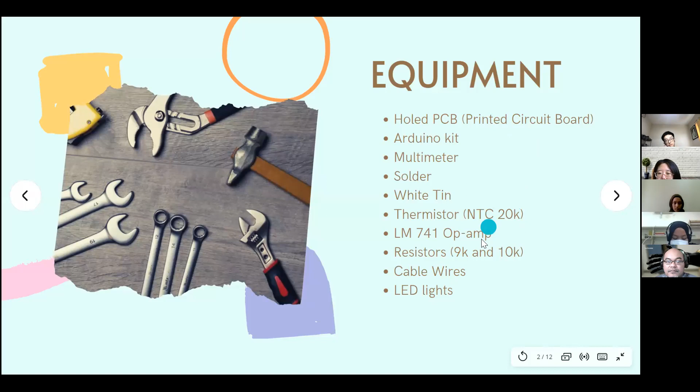This is the equipment that we use. We'll use PCB, thermistor, op-amp, resistor, and the other things.

So how does it work? First, the NTC 20K thermistor will sense the temperature and it will set the value of the resistance. Then, if the temperature is lower than 38 degrees, there will be no voltage outputted. And if the temperature is higher than...

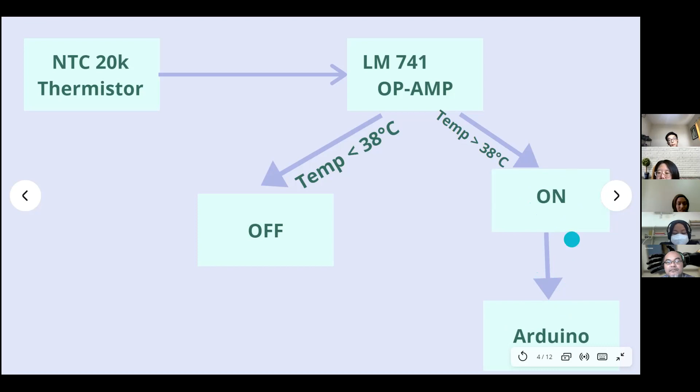...38 degrees Celsius, which basically means you have a fever, the op-amp will output voltage and it will turn on and set the Arduino on, and the Arduino will then set the LED to light.

So this one is the NTC Thermistor. Basically, the NTC Thermistor we use means that as temperature increases, the resistance will decrease.

And we will be using an LM741 op-amp. Basically, the important thing here is the supply voltage maximum, which is around 18 volts. For our project, because we are within the range of -55 to 125, we decided to use this LM741 op-amp.

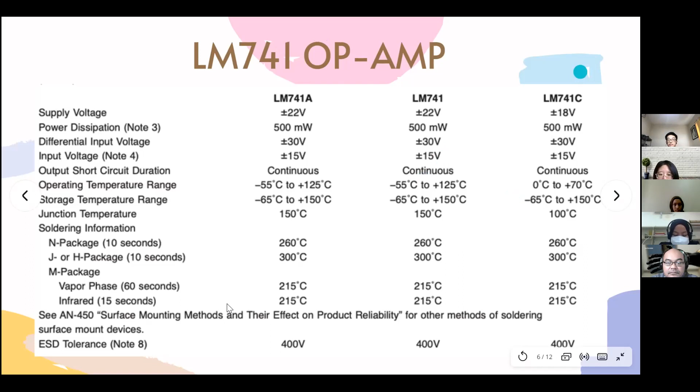Okay, so this is basically the circuit that we thought of for the temperature sensing. In Multisim, we don't have a thermistor, so we decided to model it with a resistor.

So basically, how an op-amp works is that the difference between the input voltages will be amplified by the operational amplifier. Due to the high gain of the amplifier, if there's a difference, it will amplify the voltage.

Now, if V plus, which is connected to this one, is higher than V minus, then the op-amp will produce an output. However, if V plus is less than V minus, the op-amp will not produce an output.

Basically, this resistance value we chose through trial and error of calculation, because we want to make sure that at normal temperature, it does not produce an output. How we determine the resistance value for the thermistor can be seen in the next slide.

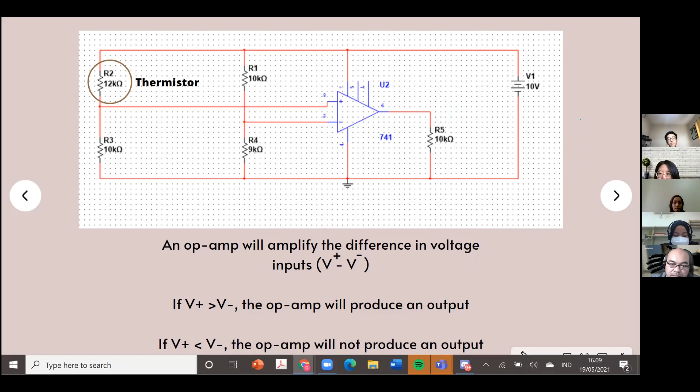And so we model it as 12K in the Multisim. And for the fever temperature, if it is higher than that, it is around 11K ohm.

So this is the circuit when the thermistor resistor is set to 12 kilo ohm, which means it's in normal body temperature. When we applied the voltage divider formula to this, we get that V plus is less than V minus. Therefore, there is no voltage output, so it would just be off.

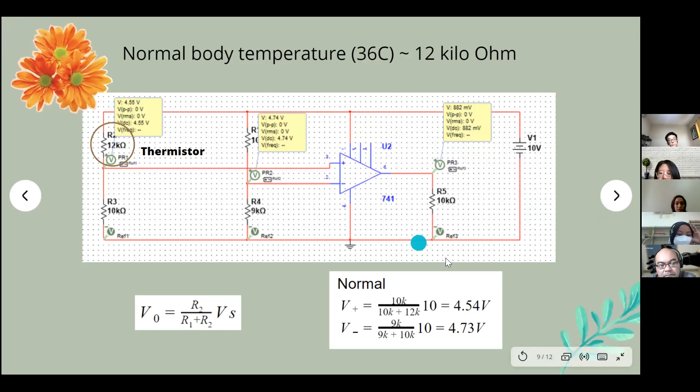This is when the thermistor resistor is set to 11 kilo ohm, which means it's in a high body temperature. Calculating again, we get V plus is bigger than V minus. Therefore, there will be a voltage output, which means it will activate the Arduino.

So for now, we haven't finished with the Arduino program, but basically later what we plan to do is make the Arduino read the temperature as the thermistor resistance increases or decreases, through the Steinhart-Hart equation shown here. And of course, later we will try to construct the breadboard circuit. Yeah, I guess that's it for now.

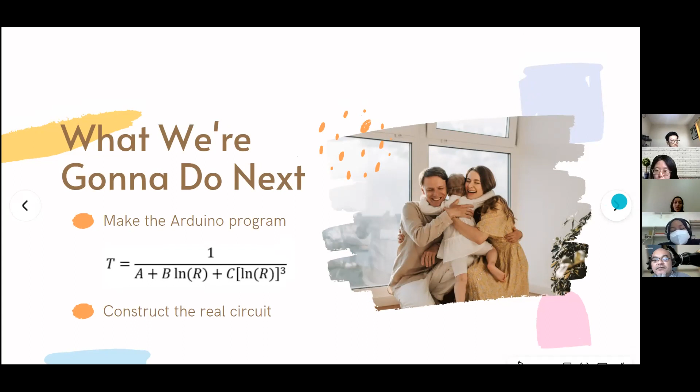Hello, can you hear me? Yes, we can hear you. Okay, I have a question. Where are you planning to place the Arduino?

We're planning to place it next to the VPR3 over here in the output area. Oh, why over there? Because that part is where the op-amp will produce an output, so we can try to relay the output.

We also plan to use a relay circuit, and later we will connect it to the Arduino, and basically it will turn on or off. Oh, okay, that's quite clear. Okay, thank you, Jesse. Hanif, one last question: why do you use a 20K NTC Thermistor?

Okay, for the 20K thermistor, we actually also tried the calculation with a 10K thermistor. However, because we want to find a small range of temperature, the 10K one gives a small range of resistance at that temperature, so we tried using 20K instead. We can see that from 36 to 38 Celsius, it decreased from 12K to 11K. But for the 10K thermistor, the drop in resistance is very low, so there's not much difference, making it hard to get an output using a 10K thermistor.

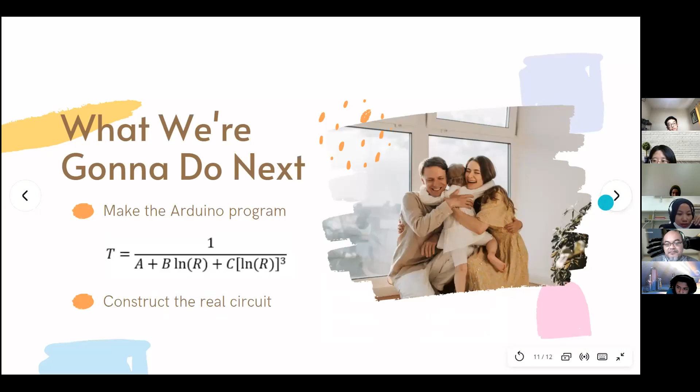It's like the previous one, Group 1, this is the same. This is not active temperature sensing. Do you understand why this is not active temperature sensing, what you just presented? Yeah, because we don't control the current. Yeah, exactly, there's none. So this is too simple for you. I know three of you are smart, you should do more challenging projects, not just like this.

Do you understand how to make it an active temperature sensing? We will try to use a heater later. Yeah, if you don't understand, you can ask Martin, Martin already understood.

Active temperature sensing does not detect temperature passively like you're using now with a thermistor. The thermistor is just based on material properties, NTC or PTC. Then you try to convert that resistance change into voltage change, using either a voltage divider or Wheatstone bridge. But that is just to display. The function of the Arduino is just to display the temperature.

What I want is for you to use the project title as shown in Google Classroom: thermal regulation in an active temperature sensor. Thermal regulation, that is the keyword. To regulate the thermal, it means you have to use a heater, a heater that will flow current through it such that it has a certain temperature.

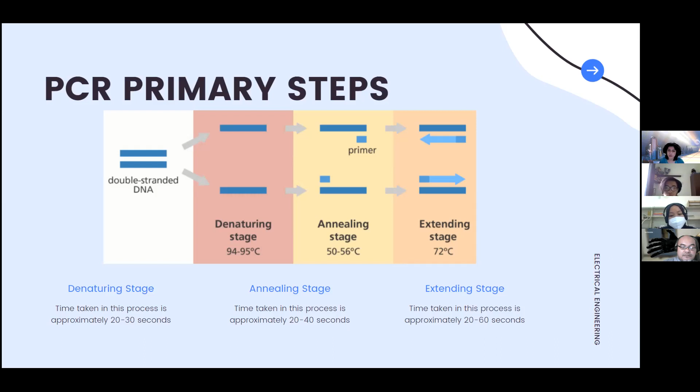This is so challenging because we have to maintain the temperature within a specific range. For instance, if we have a higher or lower temperature than ideal in the annealing stage, the primer would not bind perfectly to the single-stranded DNA.

Our proposed solution is to build a thermal cycling system using a microcontroller called Arduino Uno, which functions to control all the components in the system and control the temperature of the sample.

Because our focus here is only the electrical part, we're going to use a sample in the form of water.

The four main components for our device are: a heater, a cooler, a temperature sensor, and an Arduino.

For the heater, we're going to use nichrome wire, which is a non-magnetic alloy of chromium and nickel, commonly used as a heating element.

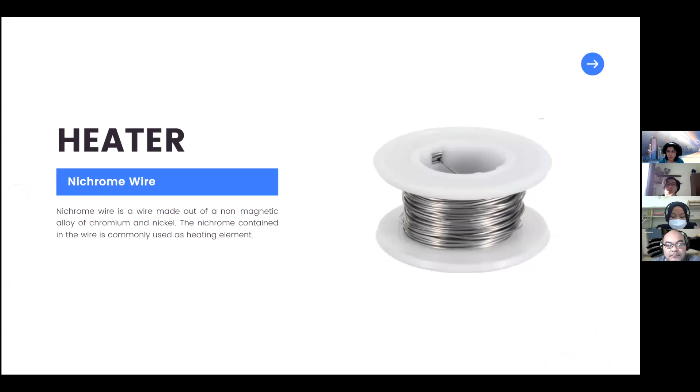The advantage of using nichrome wire is that it is low cost and relatively stable at high temperatures. To improve its performance, we form it into a meander shape, which will be shown in the next slide.

For the cooler, we're going to use three different components: the Peltier cooler, the heat sink, and the cooling fan.

The Peltier cooler is a thermoelectric cooler, or TEC, which uses the Peltier effect. It's like an active heat pump that transfers heat from one side of the Peltier cooler to the other, so in the end one side will be hot and one side will be cold.

A heat sink is a component that provides a surface area for heat to flow away from hot components, similar to a cooling fan, improving the performance of hot components.

The cooling fan, similar to the heat sink, also improves the performance of hot components such as the Peltier cooler, by blowing cool air onto them.

For the temperature sensor, we're going to use a thermistor, a device used in a circuit to measure temperature. The advantage of using a thermistor is that it's very sensitive.

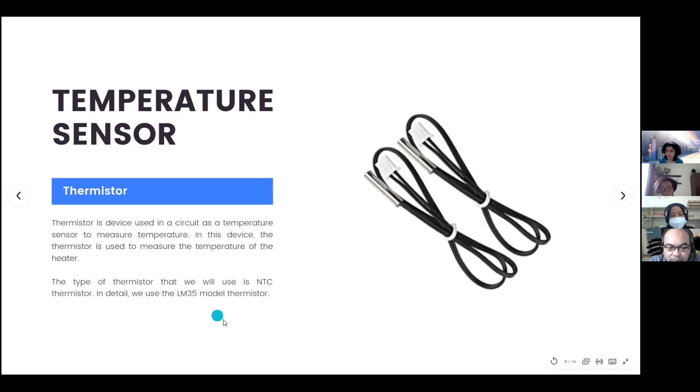Okay, for this, these are some other components that we use in our circuit: the relay, the 4-channel relay, the resistor, and the adapter, a 12-volt adapter.

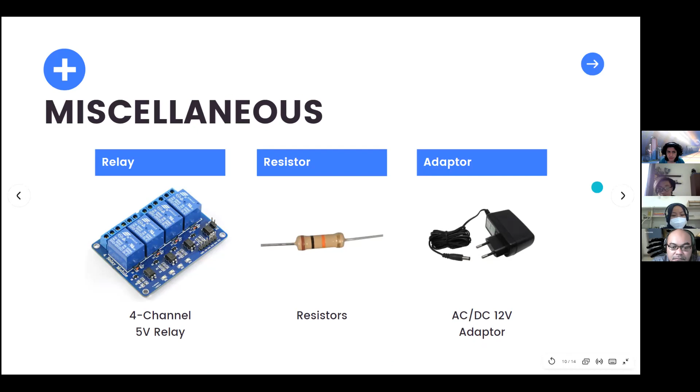Now we're going to talk about the outline of the circuit. Basically either a 12-volt battery or adapter AC to DC converter is connected to the relay. Because we have a 4-channel relay, which is connected to the 4 elements, we connect this power supply, the battery, in parallel so that each channel obtains 12 volts. Then it is connected to the Arduino Uno digital input, so that the Arduino can detect all these 4 components and control whether to turn on the heater, turn off the heater, turn on the cooler, or something else.

We also connect the thermistor into the Arduino Uno so that we can read the temperature. However, the Arduino cannot just directly read the temperature, so we have to convert the resistance of the thermistor into a readable temperature using a specific equation, the Steinhart equation. Then the Arduino itself is going to be connected with the computer.

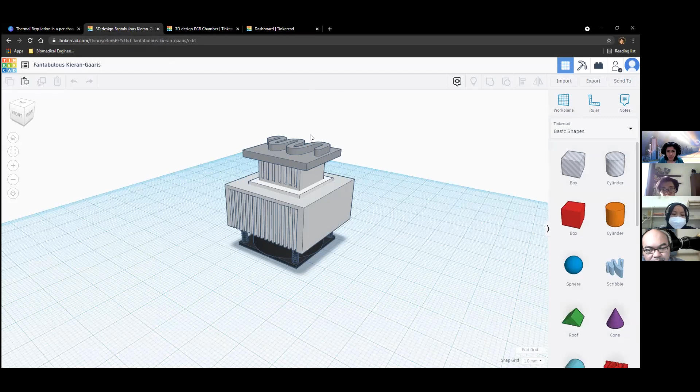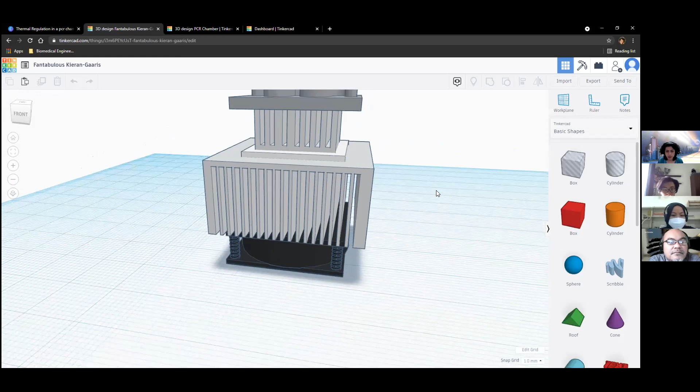For the schematic, we've made a design in Tinkercad. This is the heating element, the nichrome wire, and it is separated with the conductor. Underneath is the cooling element. The white square here is the Peltier cooler, and it is attached to heat sinks. On the bottom we have this cooling fan.

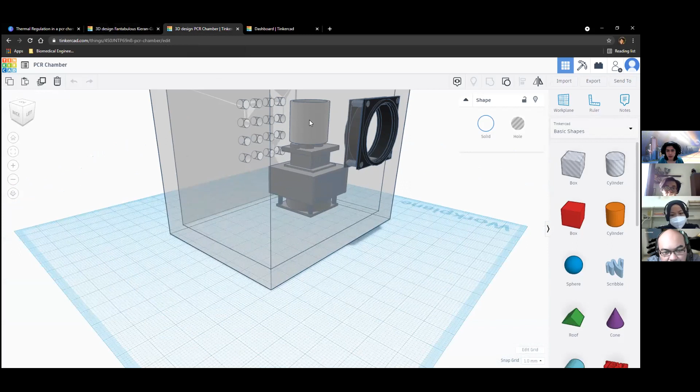It will blow air to the hot side of the Peltier cooler. This is just a rough sketch, and the casing is optional if you want to make one. These heating and cooling elements will be included inside the casing, and on top of the heater we're going to add the water sample.

In this area we're going to make a partition to include the circuit, the Arduino, and stuff. We're also going to connect the thermistor into the heating element so that we can keep track of the temperature, whether it is more than the ideal temperature or lower than the ideal temperature, so we can monitor and program it in the Arduino.

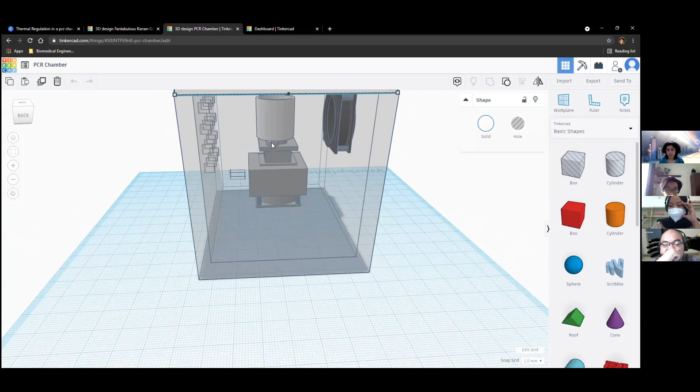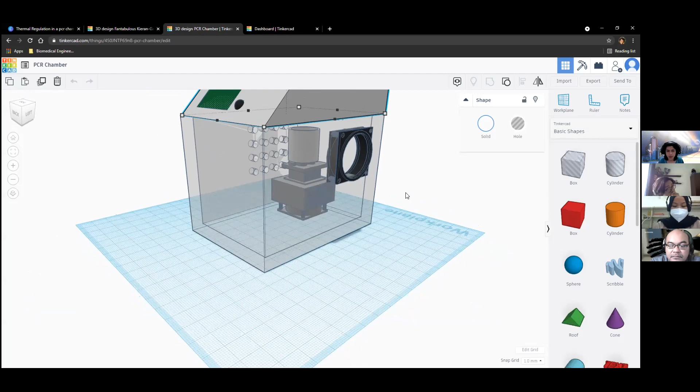For the sake of air regulation in the casing, we make some holes on one side to let air go through. Then this fan on the other side sucks out all the heat inside the system and out of the outer system. Yeah, so basically that's it.

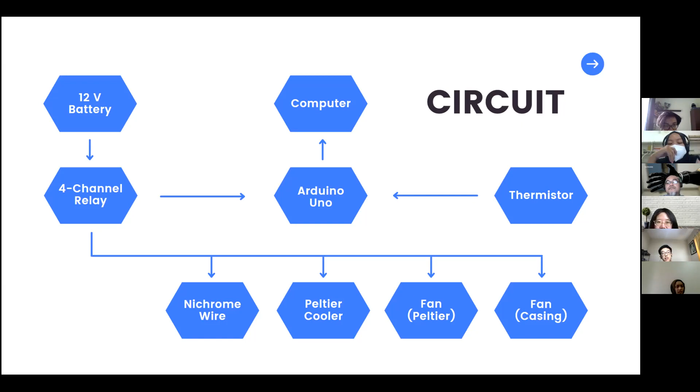Basically, the top side of the Peltier cooler is the cold side, and the bottom part is the hot side. When in doubt about determining which is the hot or cold side, you can just plug in the Peltier cooler for a few milliseconds, because it is very sensitive to temperature change. So you just plug it in, then unplug it, and test it with your hands to feel whether it is the hot side or the cold side.

The cold side will be connected to the upper part of the heating elements, and the hot side will be blown by the fan on the bottom part, as shown in the schematics.

Okay, thank you. Kak Devita, maybe one short question. Please unmute yourself, Kak Devita. Okay, can you please move to the slide that shows the Tinkercad design of your instrument?

Can you please explain why did you build the instrument like that? Like the Peltier is between the heatsink, and then why is the fan over there?

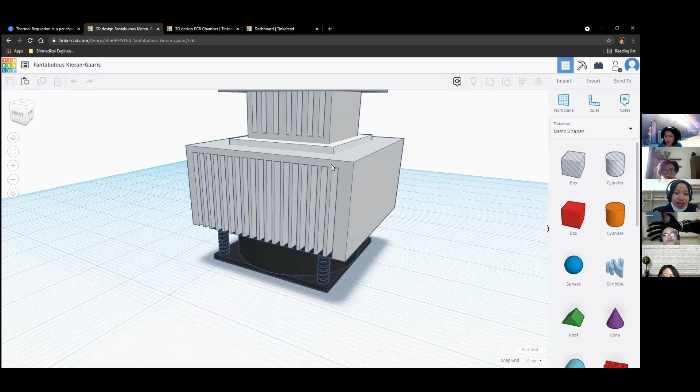Okay, so basically, for the cooling element, it is already in a kit. So normally, if we find the Peltier kit in the industry, we find the Peltier in the middle, connected to the heatsink on top of it, and underneath the Peltier cooler, the bottom part of the cooling element is connected to the fan. So it will blow air to the hot part of the Peltier cooling.

And then we just added the cooling element underneath the heating element for the design, so that we can get direct contact with the heating element, so that if we want to reduce the temperature, the cooling element is directly connected to the heating element.

Okay, maybe you can just learn more about the heatsink, and also the size, because there are some specific sizes for the heatsink. I think that's all.

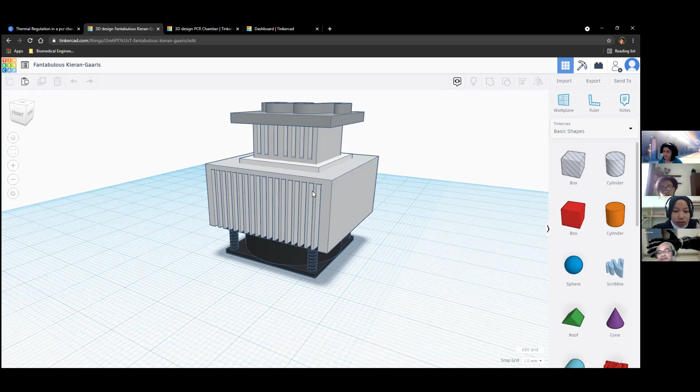Thank you. Okay, Jesse and Hanif. Which temperature are you trying to control? The chamber. So why did you put the cooler underneath the heater?

We actually thought that we will reduce the temperature of the heater. No, but the temperature that you want to reduce when it is time for cooling is the chamber temperature, not the heater. The heater you just turn off, and then you cool the chamber.

Sorry, sir, our mistake. Okay, please revise it for your first milestone report. And explain more also on the point that you still miss in the presentation, which is the algorithm of the control.

Which will form your software. How are you going to control that? Which when to turn on the cooling fan and the Peltier, when to turn on the heater, and how to maintain them. Is it like group 2, if I'm not mistaken, group 2 or group 4?

Group 2, using on-off algorithm, or do you want to use a different control algorithm? We actually gonna use on-off algorithm. Okay, on-off is the simplest, although not as accurate.

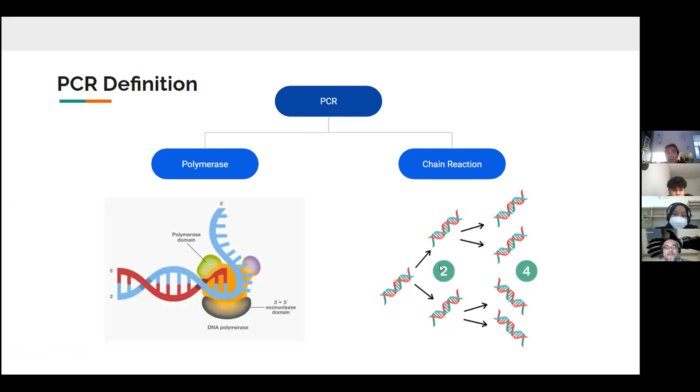First, we will start with the theoretical overview. PCR stands for polymerase chain reaction, where polymerase is an enzyme which makes polymers of other molecules, which in this case is DNA. Chain reaction is a type of reaction which progresses in an exponential way, so it will produce product exponentially.

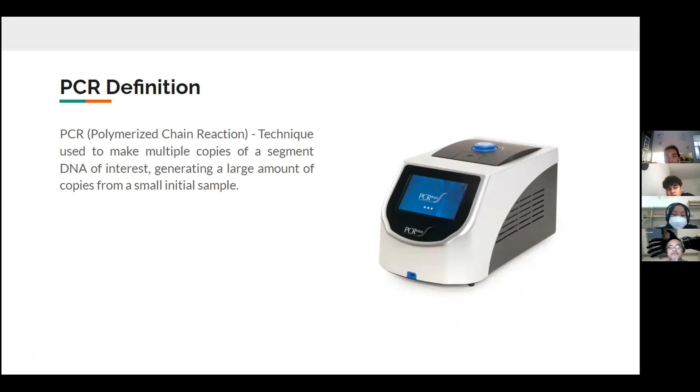So PCR, or polymerase chain reaction, is a technique used to make multiple copies of a segment of DNA of interest, generating a large amount of copies from a small initial sample.

Next is PCR usage in diagnosing viral infection, in this case COVID-19. First, a sample will be taken from the patient's nose and put into a tube containing important ingredients, and then put into the PCR chamber machine, and billions of copies of the DNA will be produced and can be analyzed later on.

The important key ingredients of PCR are: first, the template DNA, which is the DNA we want to amplify; the primer, which is a short sequence of nucleotides that provides a starting point and selects the exact point of DNA to be amplified; the DNA polymerase, which is the enzyme that makes a new strand of DNA using the existing strand as a template; and nucleotides, which are the basic building blocks for DNA synthesis.

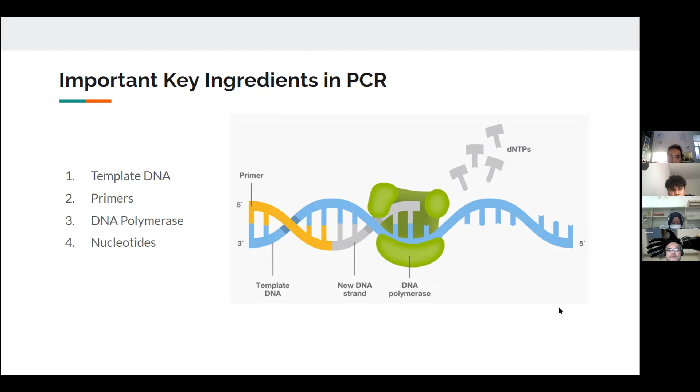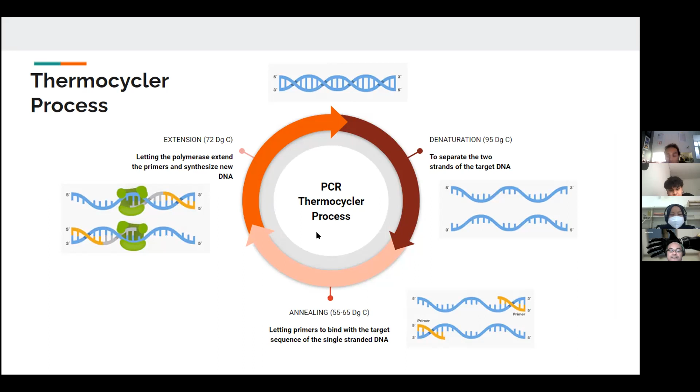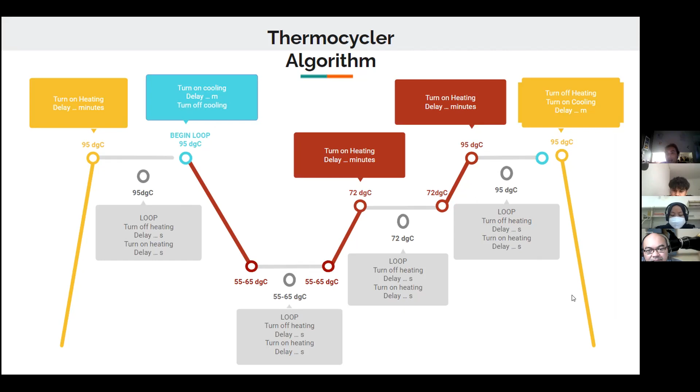And then after we achieve it, we can break from the loop and then turn off the heating and turn on the cooling to bring back the chamber to room temperature. And that is all. Any questions?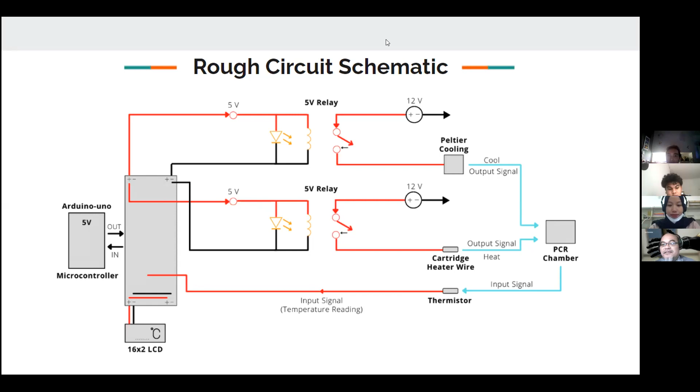From this presentation, most of the groups doing project 1 have got it correct, even though details are still missing. But groups doing project 2, thermal regulation and active temperature sensor, many of you still misunderstand the project, what it is all about. I do not want passive temperature sensing, that will be too easy for you, there's no point keeping it as a project. So I want you to develop a control system for active temperature sensing.

So those groups doing project 2, active temperature sensing, do you understand? From all of you, I think Martin has shown feedback that he understands. I'm not sure about the other two groups, so please, you can ask Martin, he understands what I meant.